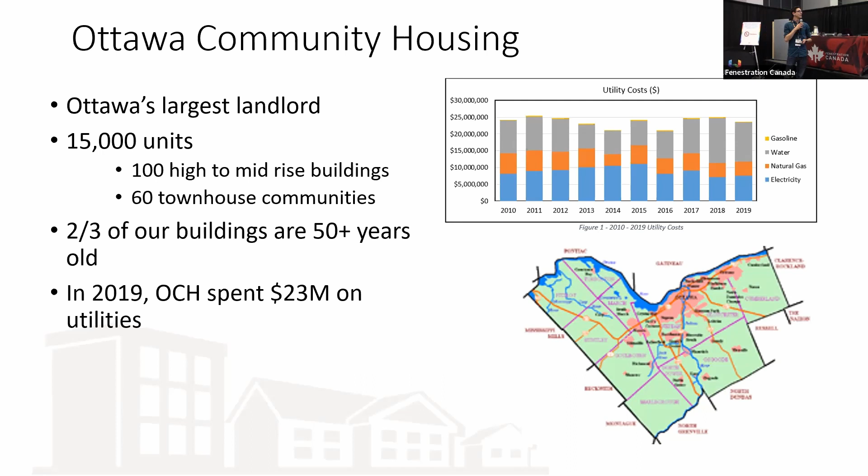That's how over the past 10 years we've been able to save about $46 million in total. In the same time, we've also added a significant amount of solar generation to our portfolio, over 500 kilowatts currently operating. In fact, last week that became 620 kilowatts, and by 2024 it's going to be a full megawatt of urban solar generation.

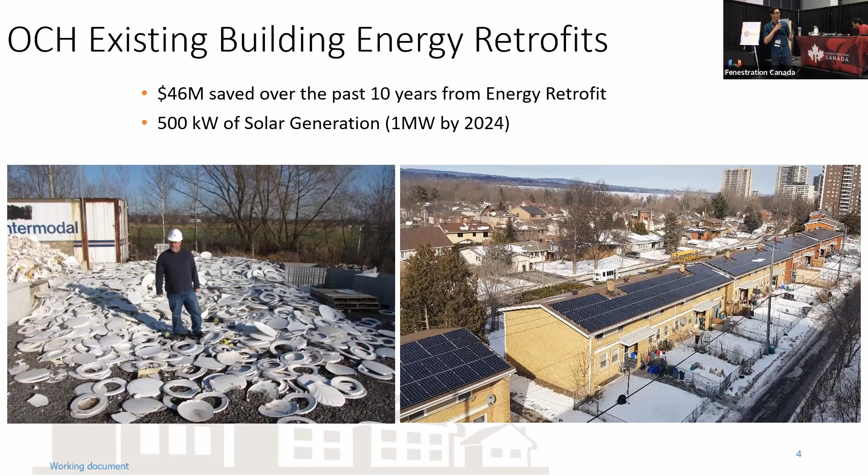So how are we tackling that issue? I'm going to show you how OCH ran a pilot project to do a deep energy retrofit as a proof of concept of the system. We went to 197 to 203 Presland, the prefabricated exterior energy retrofit project.

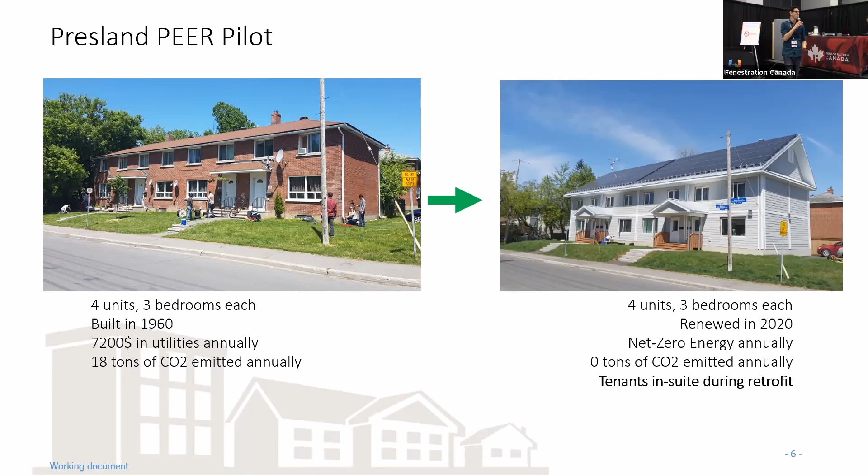It is a 4-unit block of townhomes, 3 bedrooms each, 2 stories, built in the 1960s, and had about $7,200 of utilities every single year. It was emitting about 18 tons of CO2 every year. After our deep energy retrofit, still 4 units, 3 bedrooms each, renewed in 2020, it is now fully net zero energy, emitting 0 tons of CO2. And we did all of that retrofit with the tenants in place.

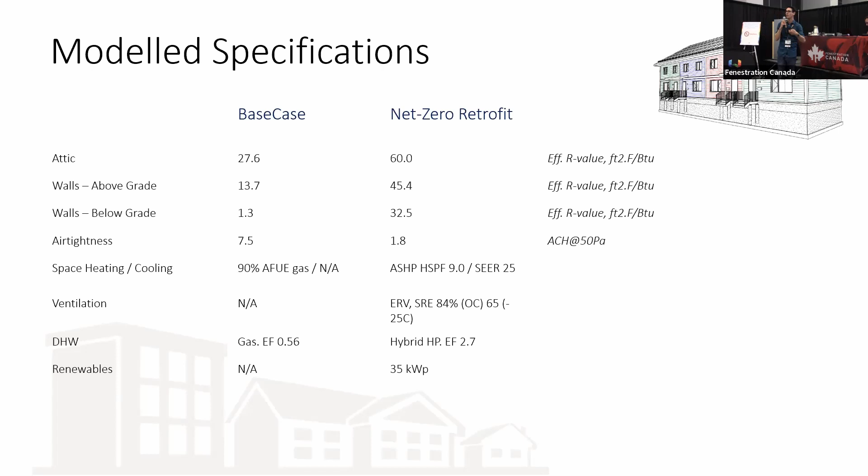So just to give you a little bit of stats, and then I'll show you a time lapse of what we did. We significantly improved the building envelope, going to R30s, 40s and 60s in the roof. We're replacing the existing natural gas equipment with heat pump technology, both on the domestic hot water and the furnace. And once we've done that, we're adding solar on the roof to try and generate as much energy as we're consuming.

Just an idea of how the area measures up: we significantly reduce the space heating requirements, significantly reduce the domestic hot water. The plug loads, lighting, and appliances stayed fairly similar. Space cooling was added to this building as a result, so now we've got a heat pump able to provide cooling in spaces where before they only had heating, which was a great benefit. And obviously there wasn't any generation before.

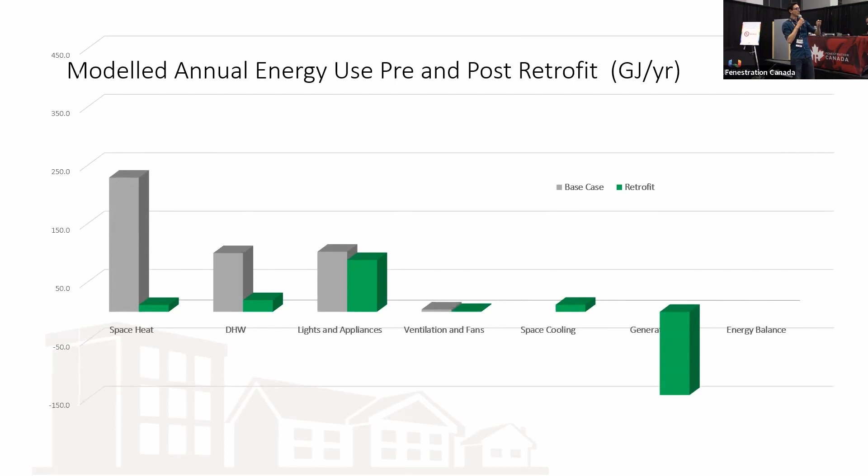So now we find ourselves in a net energy balance that is basically net zero for this site, and we've got our first year of monitoring on this. The pre-retrofit building was consuming about 120,000 equivalent kilowatt hours every year. The post-retrofit building consumed just over 40,000 kilowatt hours each year, a 66% reduction in energy consumption.

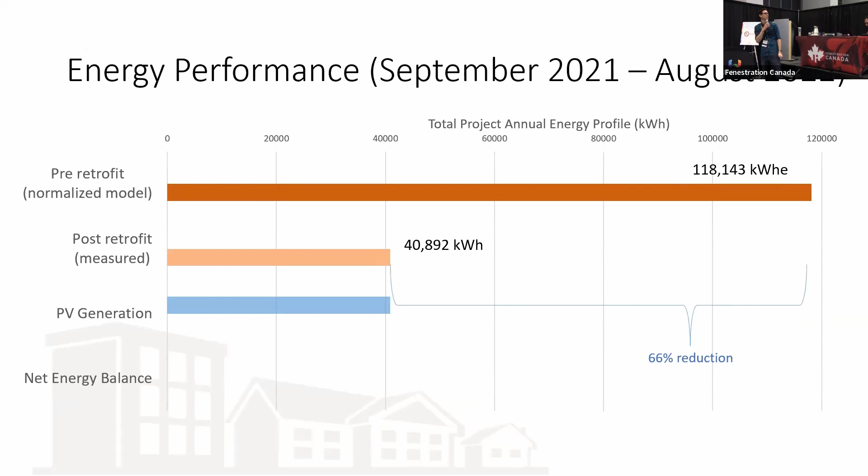And our generation lines up with that, basically matching pretty much exactly the amount we're consuming. So we've got ourselves our first net zero building, missing it by the equivalent of something like 0.01 of a difference. So basically it is done, it can be done, and it was done by a small housing provider instead of some big company.

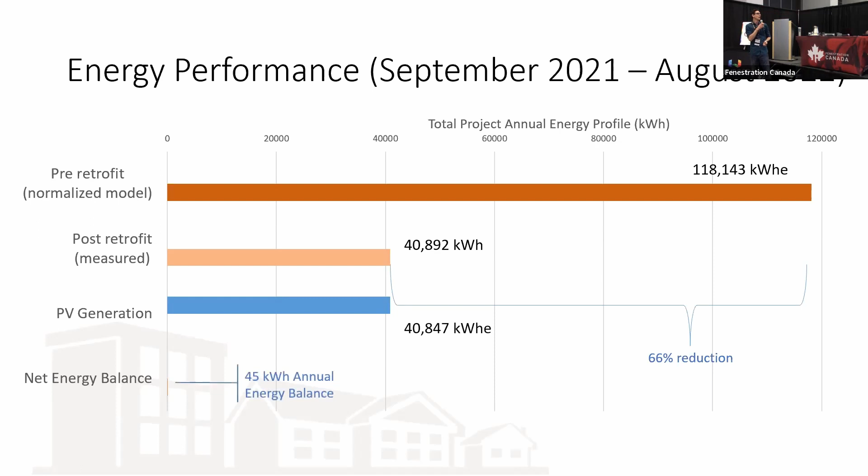So what we're going to do now is show you, in real time, a 2-minute time lapse of what we did. Terry, can we switch over to the other video? Let me see here.

Come on, I'm getting there, just be patient. No worries. I speak really fast during this, so it's good to rest a little. Okay, you want to launch? Okay, let's go, press play.

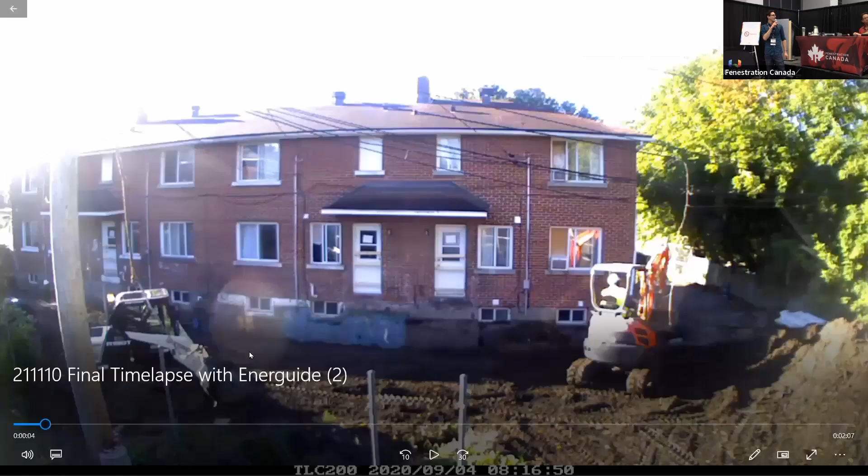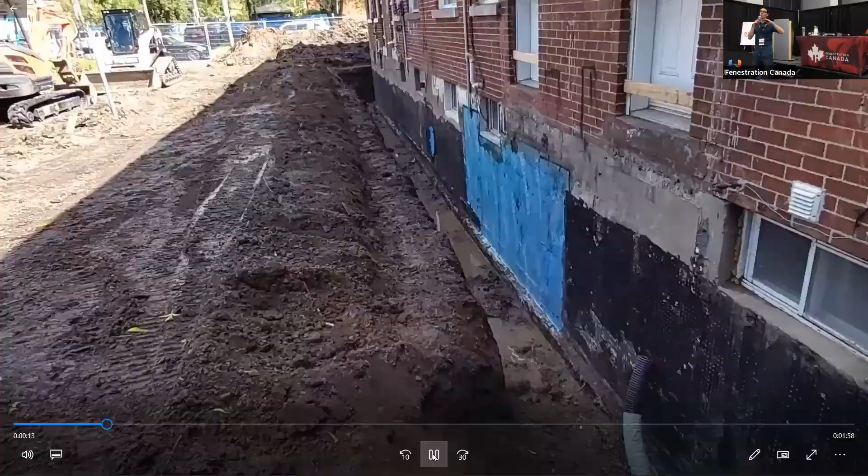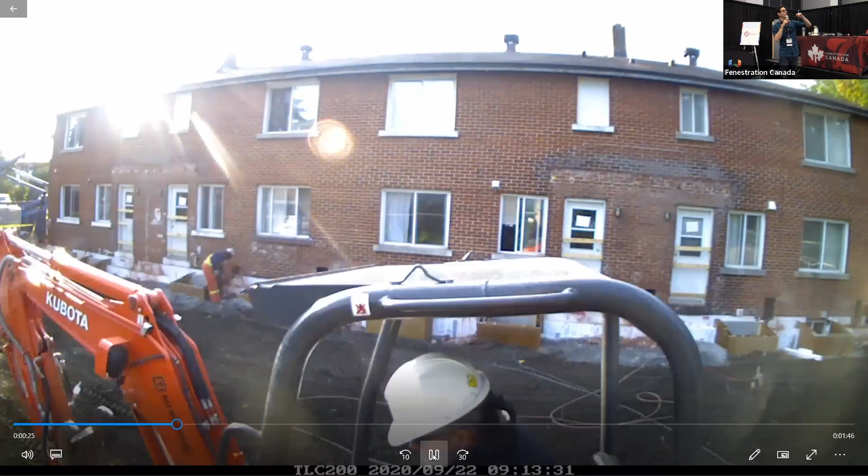All right, what we have here is our Pressland building. We dug down to the foundation, basically replacing the old weeping tile, but that also exposed the foundation, giving us an opportunity to waterproof and put an air barrier across the entire foundation. We backfilled with 8 inches of EPS against the foundation, brought that all the way above the foundation. Now you see us coring some holes along the brick, putting in brackets that are going to support a beam that will go all the way around the entire perimeter.

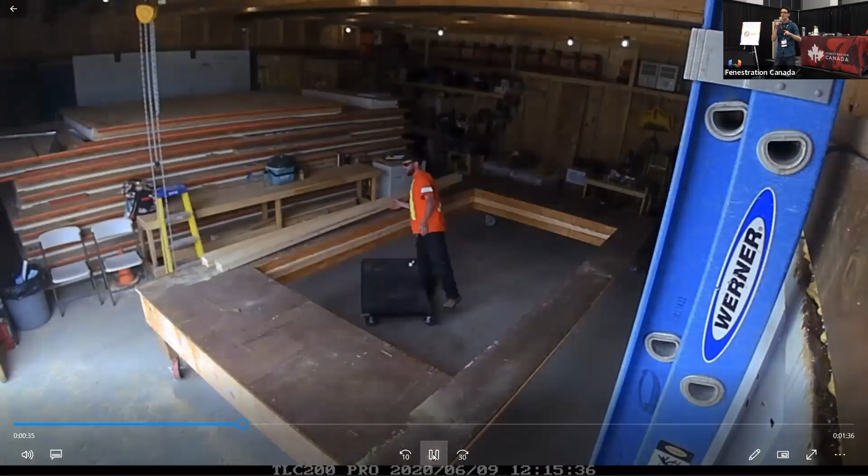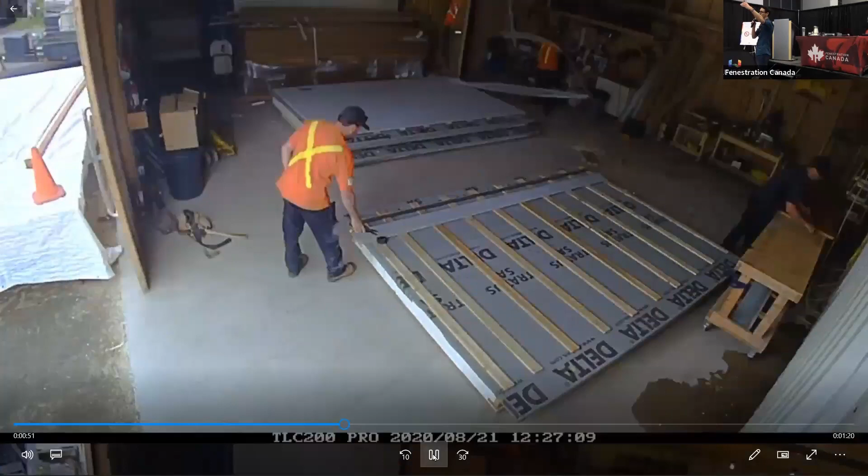Then in our shop offsite, we're stitching together SIPS panels, producing 9 by 20 foot super panels that make up the entire facade of the building, with windows and doors already cut out. The SIPS panels are 8 inches of EPS, covered with an air barrier that ties back to below grade, and we're finishing them as much as possible, adding strapping and siding to deliver a fairly finished panel directly to site.

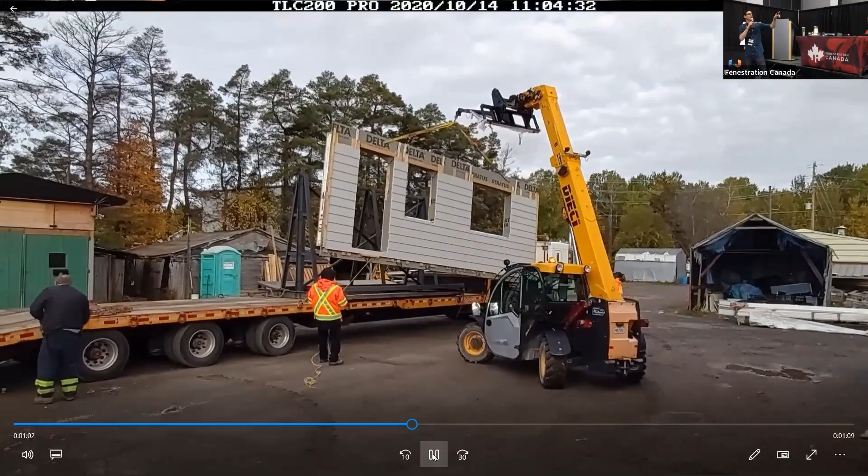That was our staff assembling it, manipulating those panels and installing them. Here they're being delivered to the site, and now you'll see us putting them on top of the building. We put about 8 panels up every single day.

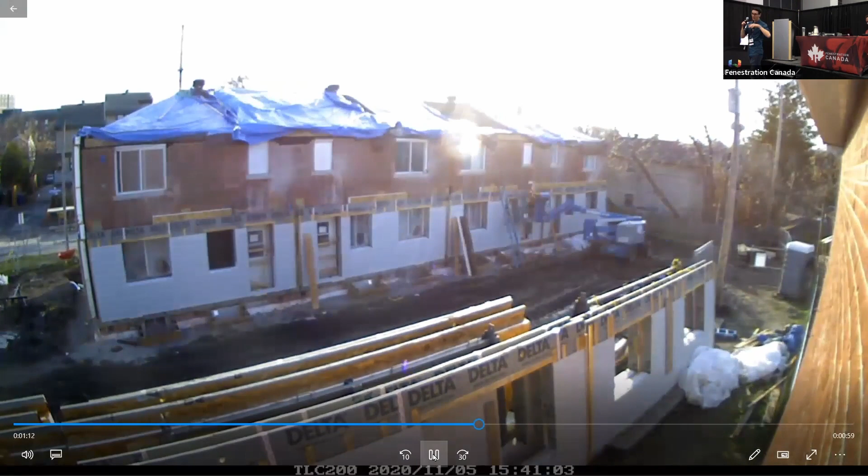It's designed to be an extremely quick process, similar to the Energiesprong model we've heard about from the Netherlands. Now that we've got this new building envelope, we can get rid of the natural gas system and put in a heat pump hot water tank and heat pump furnace.

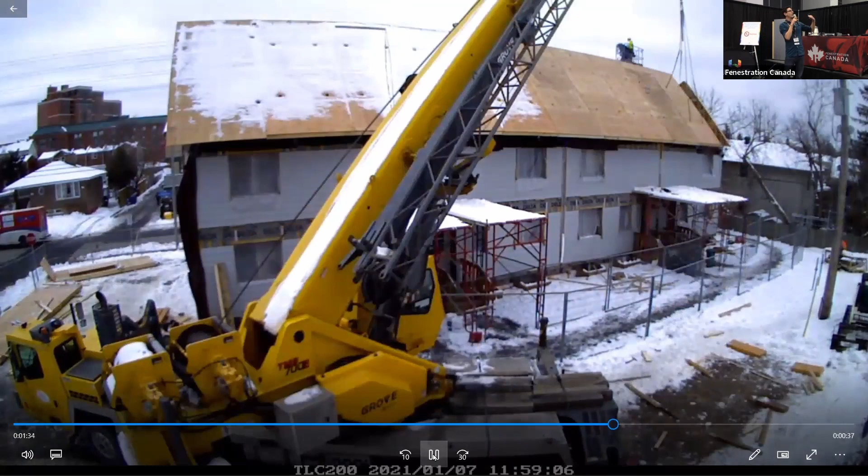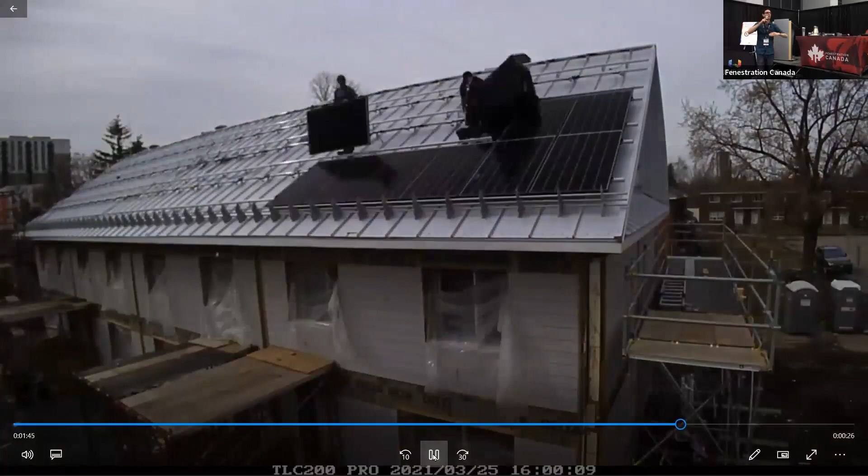To finish the roof, we brought that AVB from below grade all the way through the panels and over the roof. We put spray foam over the existing roof and added an extra super roof on top to accommodate the extra insulation needed. That also gave us a perfect southern exposure to install 34.8 kilowatts of solar panels.

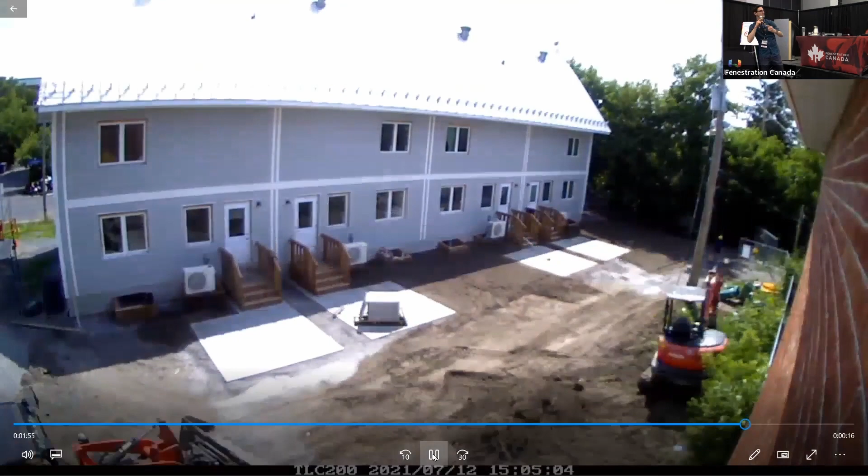Overall, the new building envelope has reduced the energy consumption of the building. The new efficient mechanical system delivers the energy required as efficiently as possible. And the solar panels are able to generate as much energy as the building will consume, giving us our 0 rating on the EnerGuide system.

Now, that's very fun and impressive. So now can we jump back to the presentation? There we go. I've given that talk a few times.

But we're here at a window manufacturer, here with Fenestration Canada. And what is the one thing that we did not see, unfortunately, in that beautiful time lapse? Hang on, I'll get there.

Screen. I think it's there, yeah. All right, right back in. Okay, so let me go back from the current slide, right? Current slide.

That's right. So what was unfortunately not featured in those videos was the windows, because if I can be terribly honest with you, that was one of the parts we had the most trouble figuring out in terms of what performance we needed to get. And sourcing these windows was especially difficult since we had to do this entire project during COVID.

I agree there were some added supply chain issues that came about, but these windows are also extremely heavy. There were discussions with the architects, the manufacturers, and the installers about how we were actually going to create this seal to keep that continuous air barrier, and how these very heavy windows were going to be installed.

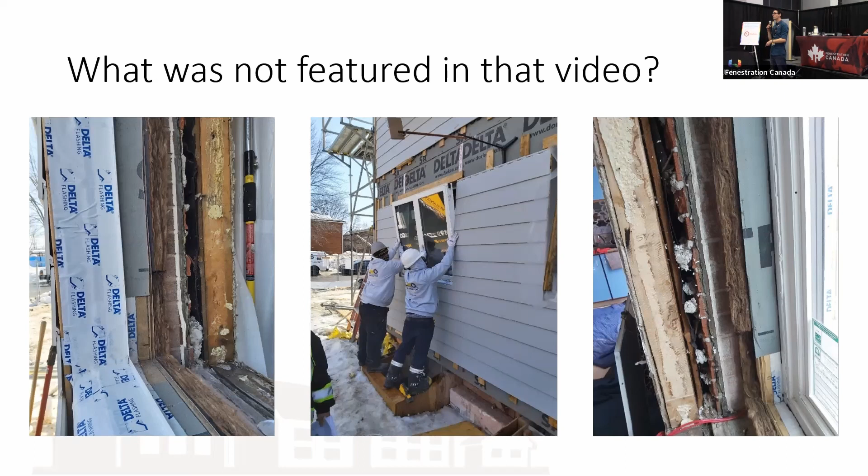We could come up with a very long list, but this was one of the weaker parts of our project. As I was discussing with Terry, he said that doesn't necessarily surprise him because maybe this isn't as much on the industry's radar. So my goal here today is to put it on the industry's radar, because we've done this one.

We need to do a lot more of this. So if I look specifically at this 197 Presland project, we were talking about getting performance for these windows somewhere around 1 U value. For what we installed, that's what we ended up going with.

But this was one building, 4 units. We're now looking to take that exact model and expand it across our portfolio. What you're looking at here are the current projects we have in design to expand that similar deep energy retrofit, where we're trying to reduce the building's energy consumption by at least 60%, if not more.

And the numbers we're talking about - that first one, Britannia Woods, that big complex, that's 180 units that need to get that treatment and reduce their energy consumption by 60%.

That's about 1,000 windows because each one of these units has 8 windows. We've got King Edward, which is this building up top here, 40 units that need to do the same thing. 115 units at 215 Wurtemburg, that's here. We've got 255 Donald, we've got Walkley Manor.

We are currently receiving concept designs from our architects and working with them to come up with a solution to do that deep energy retrofit. Some of the numbers they're telling us is, hey, we need these 1 U-value windows, we need 0.7, maybe even 0.6 in order to reach the targets we're setting out.

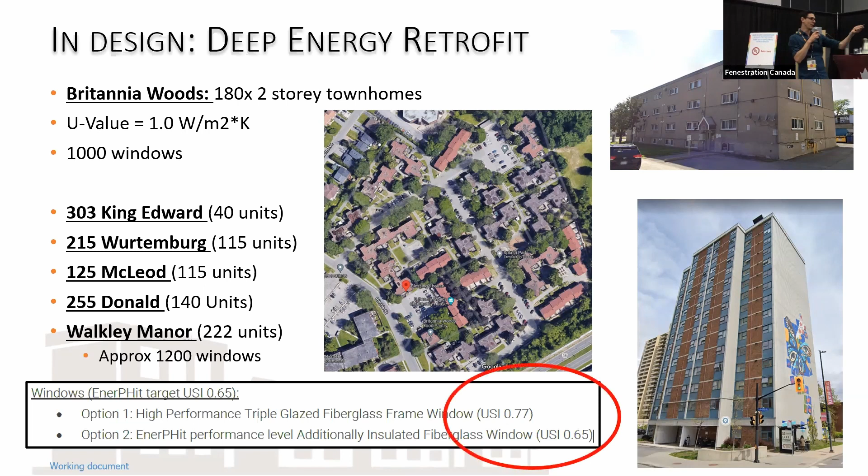And this is just Ottawa. So if I sum up, I wanted to highlight that the quantities just Ottawa is looking at until 2028 for its retrofit is about 2,400 units worth of deep energy retrofit to do, and that's going to be somewhere around 10,000 windows. That's in the next 5 years, and these are the performances we're looking at.

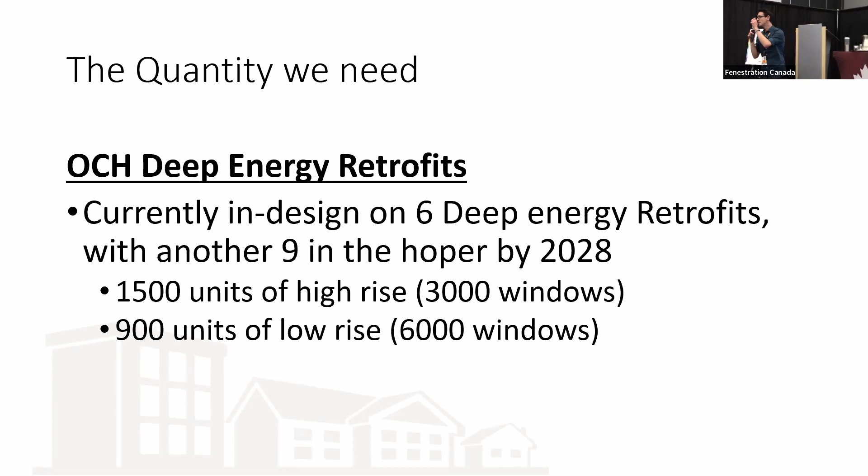These are just examples because overall, when you take Ottawa, Toronto, and Windsor, we're looking at over 15,000 units worth of social housing that needs to be retrofitted in the next 5 years. And then, if we look at the National Housing Strategy, where we're getting the funding for these things, they're talking about over 250,000 units that need to get this treatment sometime between now and 2040.

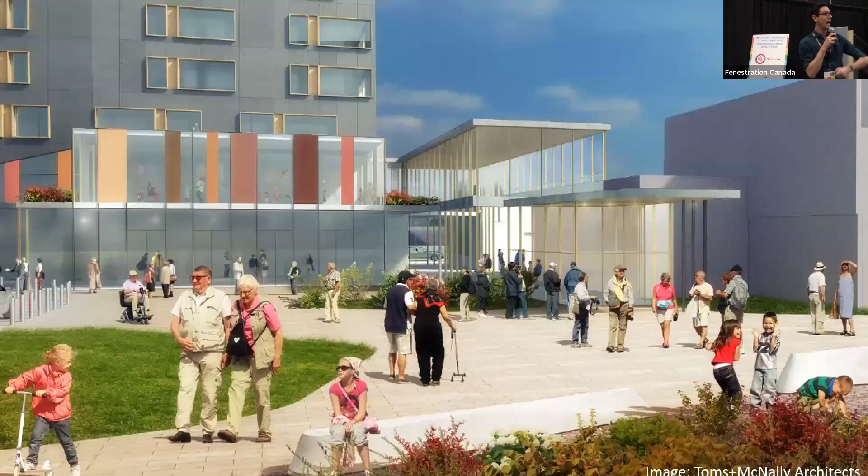So the first part of this pitch is on retrofits. Here is the size of this market right here in Ontario, right here in Canada. And that is why I think we should be talking about this. And now I will very gladly kick it over to our friend in the sky, Sean, who will give you a little bit of context in terms of the new development volumes coming down the pipeline for Hamilton, Ottawa, as well as some of the other housing providers. There's Mr. Sean.

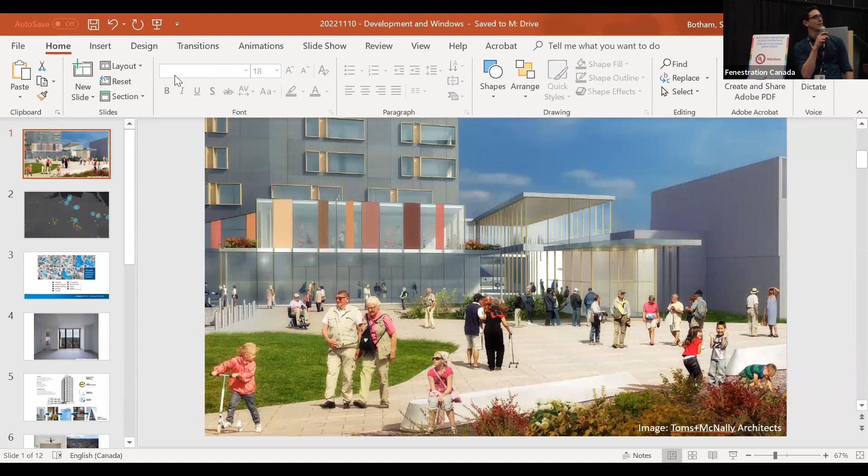Hey, everyone. So I won't talk as fast as Dan. I'm a little unwell and stuck here in Hamilton, so sad I'm not joining you right now, but really excited to present to you some of the new development work we have underway in Hamilton.

I want to just provide this as context for what other publicly owned, or municipally owned, sometimes regionally owned housing providers across Canada are doing. So it truly is amazing, and it's been enabled by federal initiatives. And there's a lot of glass involved.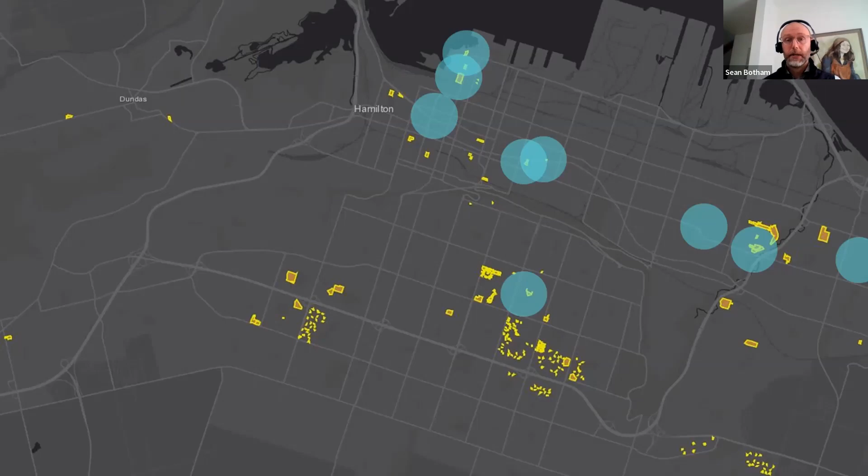These represent well over 200 million in reinvestment in housing. And what's really notable is these were just the opportunistic, easy to configure projects. We're actually envisioning 10 to 20 more, $1 billion just in Hamilton in new construction. So that's what's in the envisioning stage, never mind the 9 underway already.

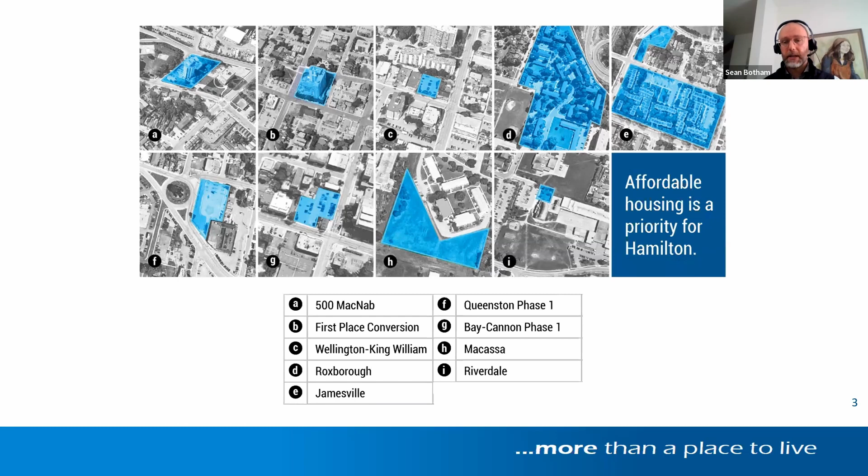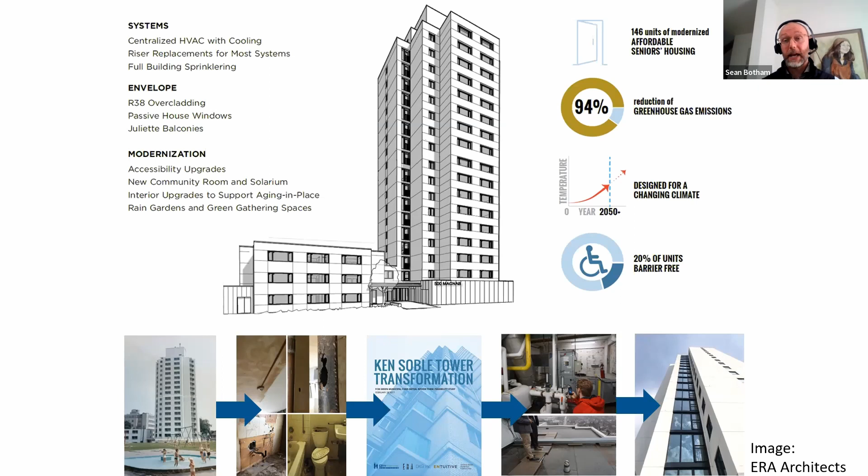I'll just note on the Ken Soble 500 MacNab. As Dan mentioned, this was the first of this size and kind globally. What it looked like is 94% GHG reduction and incorporation of accessibility, and in thermal energy demand intensity, an 89% reduction. So a dramatic reduction that we achieved with off-the-shelf parts, except for the windows and some of the HVAC. Those are our two real pain points.

I want to speak to the speed and delivery. We all know the development life cycle is quite long—5 years is pretty typical, and well beyond that is normal as well. But how the federal government is releasing funds, and this happened today: 1.5 billion was released today for rapid delivery projects. That's new money to deliver projects in just under 2 years.

I mentioned earlier this idea of partnership with the private sector. This is one of the ways we fund ourselves, but also fund new development, and what we're doing is kickstarting an industry. Part of the public sector responsibility isn't just lowest cost over the long haul as the owner and steward of funds, but how do you actually change a market. What we've seen with partners we've aligned ourselves with, both nonprofits and private sector, is them taking up the high performance banner and providing better thermal comfort, better energy usage for their tenants, whether rental or ownership.

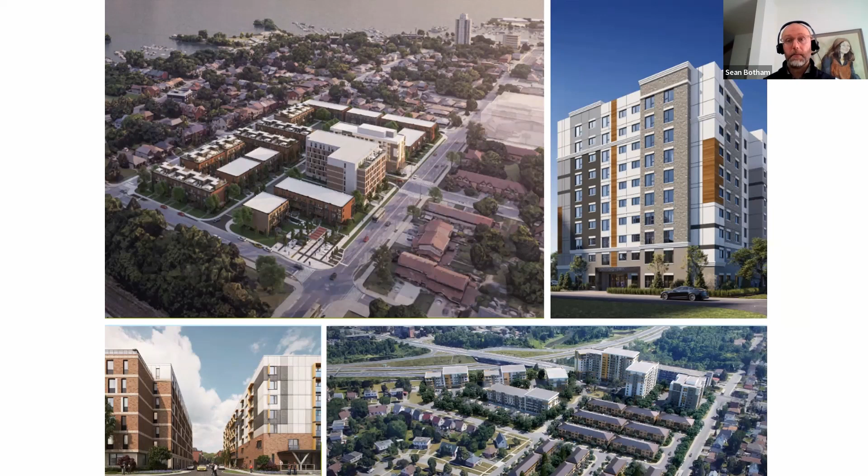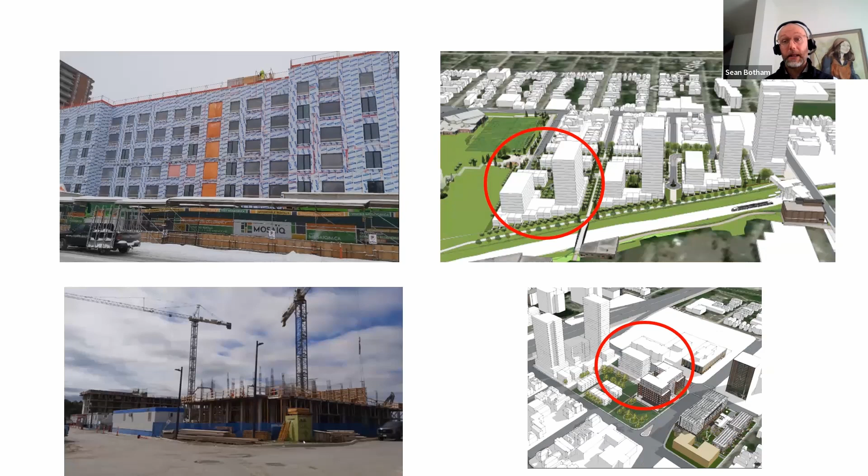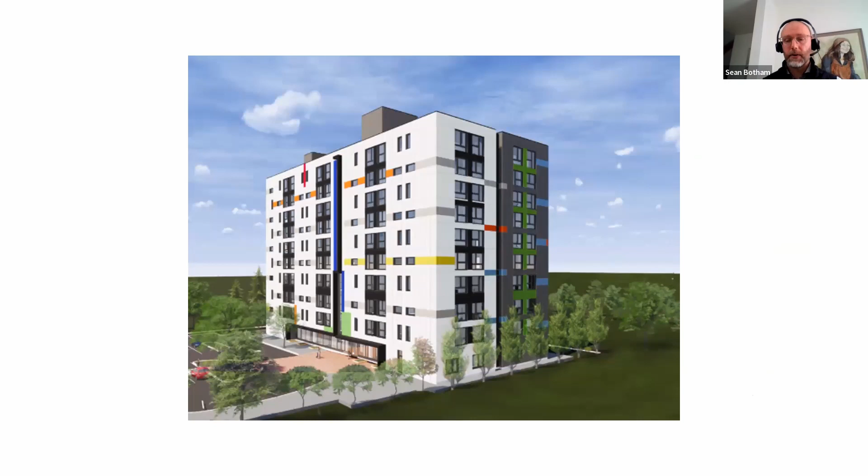As Dan mentioned, this is across the country. These are actually Ottawa projects, two on the left in construction, two on the right in planning. These four alone represent almost 4,000 windows. The scale—I can't underscore how big the scale is of these projects. Windsor, this is under construction right now. It's happening wherever you turn the page, any new city or region, and high performance by the public sector is happening.

This national housing strategy has over $72 billion already committed. Today was a 1.5 billion addition to that, so it's even growing the commitment levels. In terms of new development across Canada, Dan highlighted the 268 existing units being retrofit. This new development work is 110,000 units—these are new units being added, of which we're a part, but every community in Canada is participating in. So it is a massive rollout.

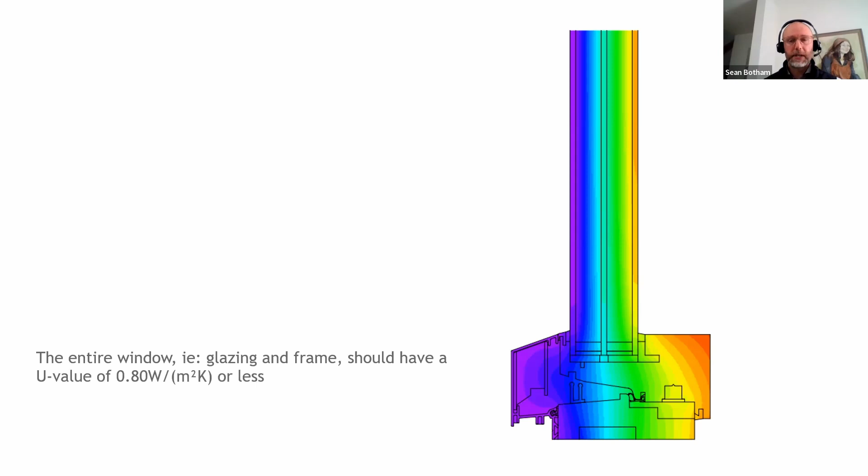Obviously, high performance means different things to different people. In terms of passive house, whether EnerPHit or new construction standards, these are very, very efficient windows with all the ways of doing that you can imagine. This is just a final slide cut sheet from windows we have installed in a project, giving you a sense of the true high performance we're after in terms of U-values and other ratings with solar thermal heat gain and all these things. So high performance windows, a necessity for our mandate.

We will purchase them in Poland. We'll purchase them wherever, but it would be really nice if we could do it in province, in country.

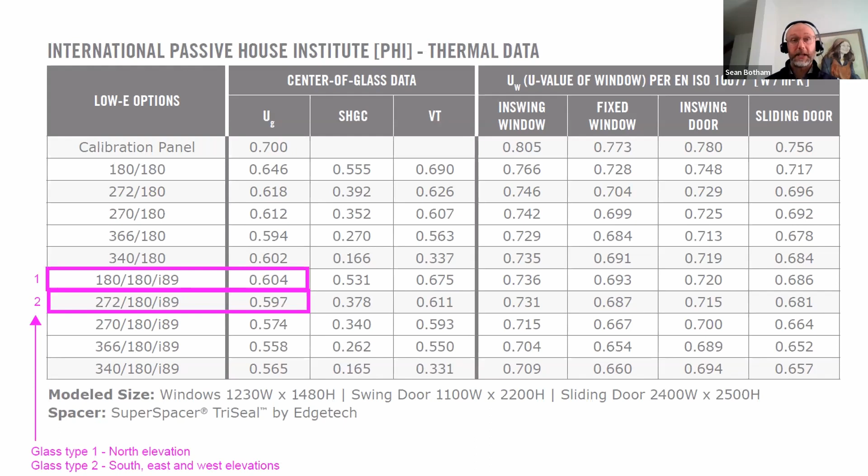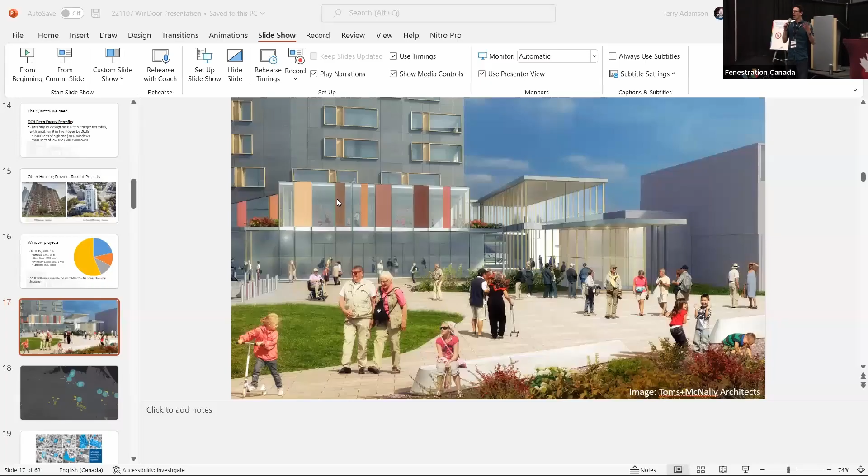So, as Sean was kind of saying, here is the volume. So now one of the questions that's probably in the back of our minds is, well, why are we so tied to the high performance? Hey, we've got windows, we can give you some windows right now. So if we go all the way to after his slides.

I'd like to tell you what funding is secured for this and why we need the high performance. So just OCH, that CMHC co-investment fund money, about $240 million for capital until 2028. In order to access that money, which we need for that 60-year-old stock to keep it around and do a new life cycle, because it's at a life cycle tipping point, we need to achieve 25% energy reduction and 25% GHG reduction of the portfolio we've submitted.

Now, we're not going to be doing a deep energy retrofit in every single building. In fact, we're targeting about 15, so we go really deep there. But that represents, for the portfolio we submitted, which is about 11,000 units, 45 million equivalent kilowatt hours of savings is what we need to deliver in order to access our money. About 7,000 tons of CO2 reduction is what we need in order to access the money that we need.

And we're not the only ones. If we look at Hamilton, they've got about $100 million, tied to something like 4,000 tons of CO2 savings. Windsor, just under 60 million, tied to about 3,000 tons of CO2 savings, as well as equivalent energy savings. And Toronto estimated some numbers, but it's about $600 million for about 15,000 tons of CO2 that needs to be saved.

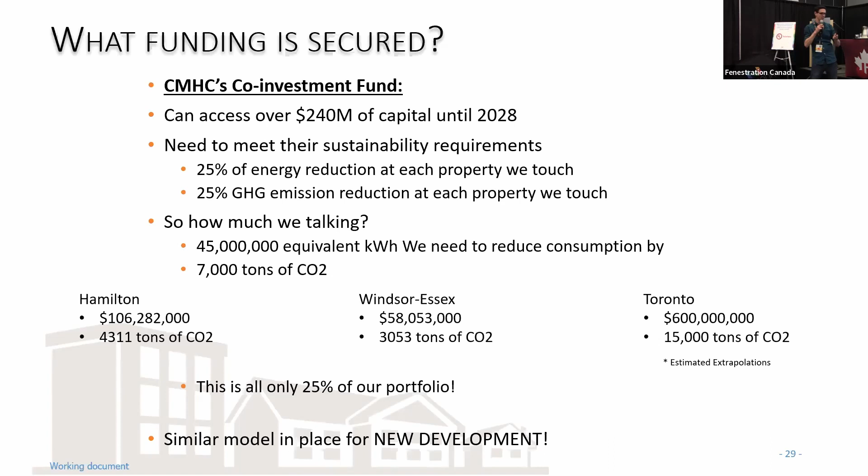And just by the way, it's a similar model for new development. In fact, for new development, they're asking for 55% energy savings over the National Energy Code for buildings. All of this money that's coming down, all of these announcements include a high performance standard in order for us to even be able to access that money, which is why we want to work with fantastic manufacturers like you so we can get these products and projects done.

So we're kind of here trying to act as a little bit of a catalyst for the market, as an opportunity to catalyze the market.

So why are we a good choice? Well, we are long-term stewards of public assets. Everybody pays the utility bills on these buildings in a way, and everybody's money is doing these retrofits. And we have a duty.

We are not going to be flipping any of these buildings. We're not selling any of these buildings. We're going to be operating them for the next 50 years, the same way they've been operated by us for the past 60. And so we have a vested interest in making that investment up front that pays dividends over the lifetime of that building and saves us in overall operating costs.

So we're looking for that long-term affordability. That's something that's built into our models. We're looking for that resilience, because we know that if we put something cheap in, we then have to rip it out later. We're not actually saving ourselves any money. And honestly, we're hoping to have these things produced locally.

Because I'm going to give this unfortunate cautionary tale. 1290 Coldrey was Ottawa Community Housing's first passive house building. This was our first foray into new development, and we wanted to make it passive house. So we ended up having to source the windows for this project from KlearWall. And so we had to import these from Ireland in order to get the performance that we were looking for, right?

Somewhere around that 0.75 U-value, and that was for 120 windows. So this was small potatoes, yes. But the trouble is this is self-defeating because we have a limited budget. We'd like it if that was locally sourced windows, it'd be a whole lot cheaper. It'd be stimulating our Ontario or Canadian economy, which would be completely...

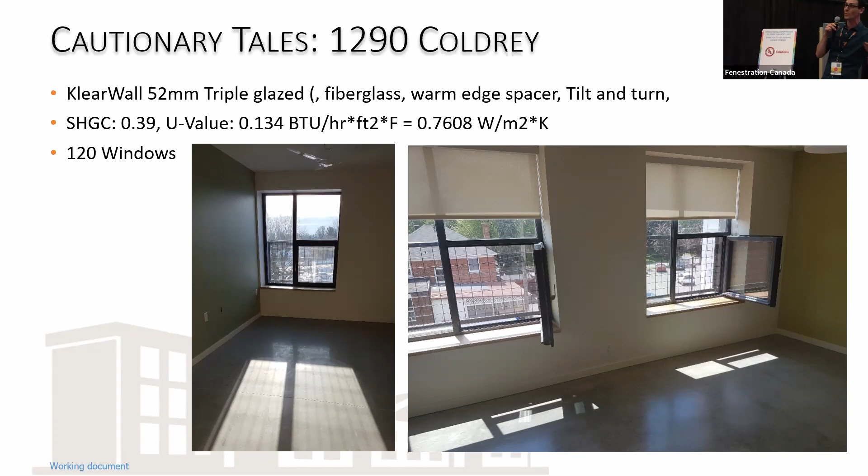So what are going to be the next steps? In all honesty, these four housing providers were getting together, and unfortunately we've all got public procurement processes. We've all got our own separate boards, and all of this money is tied up in different ways. So there's not one giant PO that's going to get issued. And in all honesty, we also want a competitive marketplace, as you guys do.

So the way we're approaching this is we're actually partnering with Passive House Canada in order to aggregate the specifications of this demand. We're taking the concept designs coming in for those projects I showed you, as well as our new development stuff from across the province, and sharing that with the experts at Passive House Canada, who are going to create a lowest common denominator of this high performance standard.

They can then use that to engage the industry and see who would be interested in a pre-qualification, saying, I know I can do this. I could provide a window that looks like this, if you stay within these parameters. For below 4 stories, I can do this. For above 4 stories, I can do that. And we're looking at this price range for these types of volumes as well.

And that way, what we get out of that pre-qualification is it will help our designers put a window in their spec that you guys will actually be able to produce, and you guys will know that the volume is coming. Therefore we will have a perfect manufacturing cycle here in Canada for producing high performance windows.